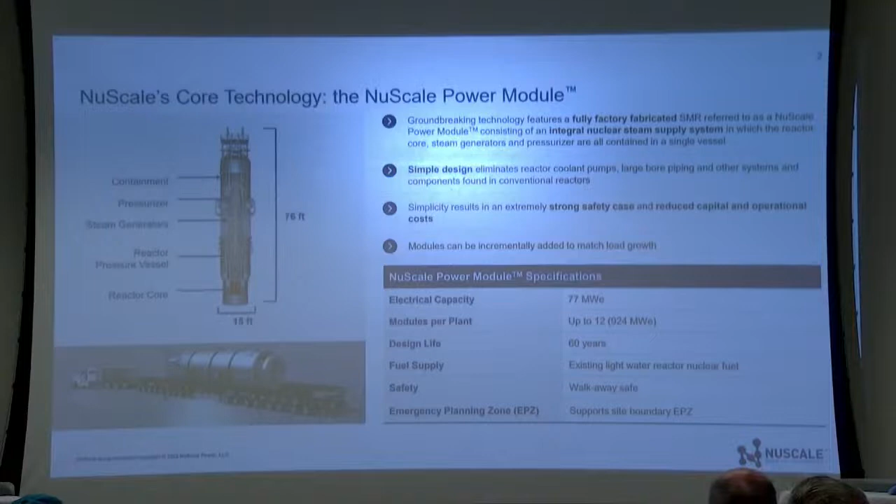Maybe? Oh, okay. Sorry. Okay, so I spoke to this already, but we think that the Alaska market could benefit from a 4-module plant. You would get 308 megawatts of power output. All of the plants, regardless of the number of modules, have a similar safety strategy, similar type of footprint. You're just changing the size of your reactor building, the size of your peripherals to generate power.

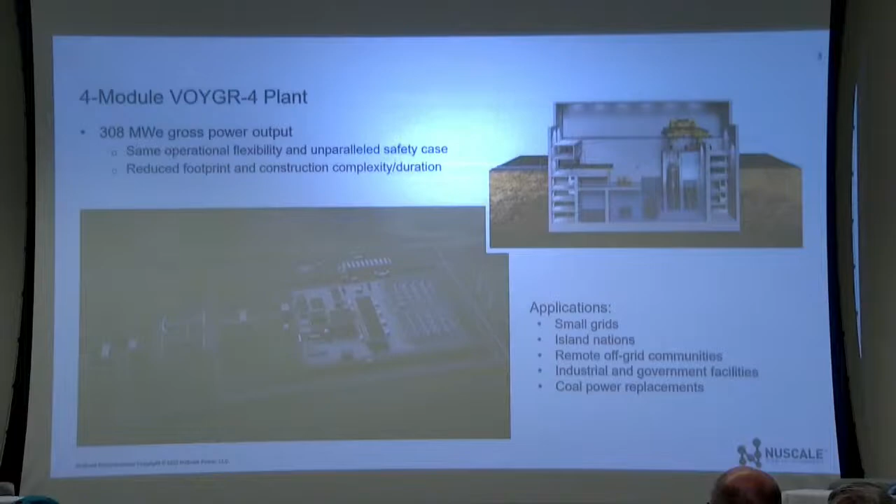We believe the applications for a plant like this could be small grids, which we know you have many of in Alaska now, island nations, remote off-grid communities, possibly industrial or government facilities. This is definitely bigger than what they're asking for the Eielson pilot project, but also as coal power replacements.

So if I go to the next slide, what am I pointing at? Okay.

We actually think that these power plants can be built to replace retiring coal plants. So the numbers up here are for a 12-module VOYGR plant. So it would yield 1,200 construction jobs for 3 years, operations jobs, and our operating life is 60 years for a plant, as well as other indirect jobs. It would preserve the local tax base.

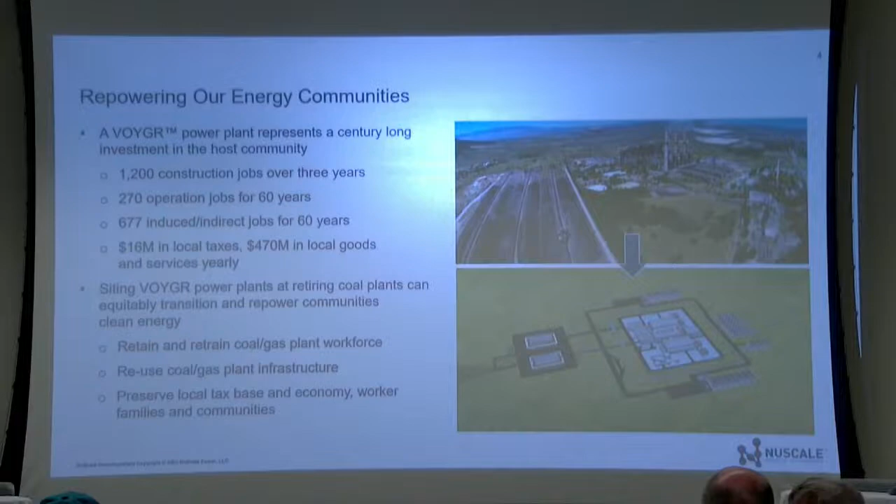So obviously the numbers would be scaled down for a 4-module plant, but it's not necessarily a linear scale, the construction jobs especially. We believe that these can be sited at retiring coal plants or other existing fossil fuel plants, and that the workforce could be retrained. So we've actually done some analysis to map the jobs at current fossil fuel plants to what the equivalent jobs would be with retraining at the NuScale power plants.

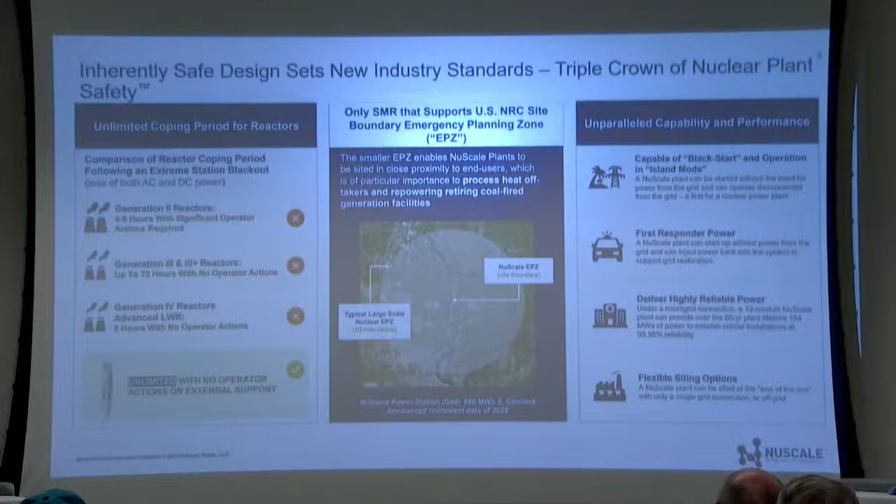This is my last SMR slide here. So we talk a lot about our inherently safe design and it being a new standard for the industry. So I just want to point out here that the things shown on the left talking about the different generations of reactors, all of those reactors have a proven history of safety. All reactors are operating safely currently.

The difference with our reactor is that ours is walkaway safe. So if there were to be a problem, it could basically be in an unattended state for an unlimited amount of time, and there would need to be no interaction to keep that reactor safe and no hazard.

So I mentioned earlier the emergency planning zone, so it's kind of hard to see on the projector, but there's a big shaded circle that shows a typical large-scale nuclear EPZ, which is a 10-mile radius, and then you can see that tiny little dot in the middle is the NuScale EPZ. So really, we can site these closer to population centers than typical nuclear reactors because they're smaller and they are inherently safe.

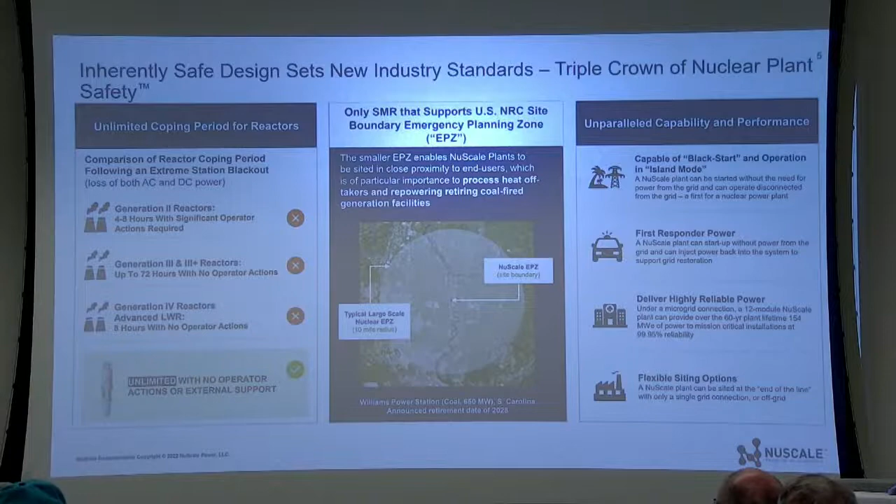Just on the right side, some additional capabilities that you're getting from a small modular reactor that don't exist for a lot of current nuclear facilities. We can operate without connection to the grid. We can provide basically startup power back to the grid in the event of a loss of power. The power is highly reliable, and flexible siting options means that it can operate off-grid or at the endpoint of a grid.

So that's all I have to say about our SMR. I talked about that because that is NuScale's bread and butter right now. But we are also developing a microreactor. So that's what the rest of the presentations I think are going to focus on.

We're doing market analysis. We identified these different markets. So we're very interested in working with universities to deploy new research reactors to further the study of nuclear engineering. We believe microreactors are appropriately sized for mining operations. Also, our design can be used for either space or terrestrial power. Remote off-grid communities, again, microgrids, replacing some existing microgrids or augmenting existing microgrids.

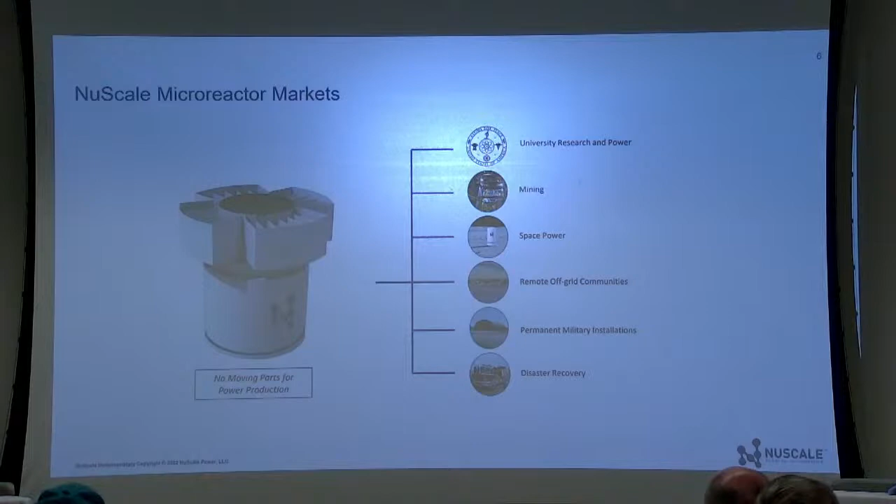Permanent military installations, this is a stationary reactor, it's not a mobile reactor. And then in the event of a disaster where the power grid is severely compromised, being able to stand it up quickly and help recover that power grid is another application for the microreactor. So the thing about the microreactor is it has no moving parts for power production. Everything is happening by natural circulation, similar to the SMR.

So our conceptual design is really focused on a similar design for both space and power applications. It's small and compact, highly reliable, automated, and it can be stood up quickly. So very similar between the space power and the terrestrial power designs. We're using liquid metal for both our fuel and our coolant. So that's something that has not been licensed before.

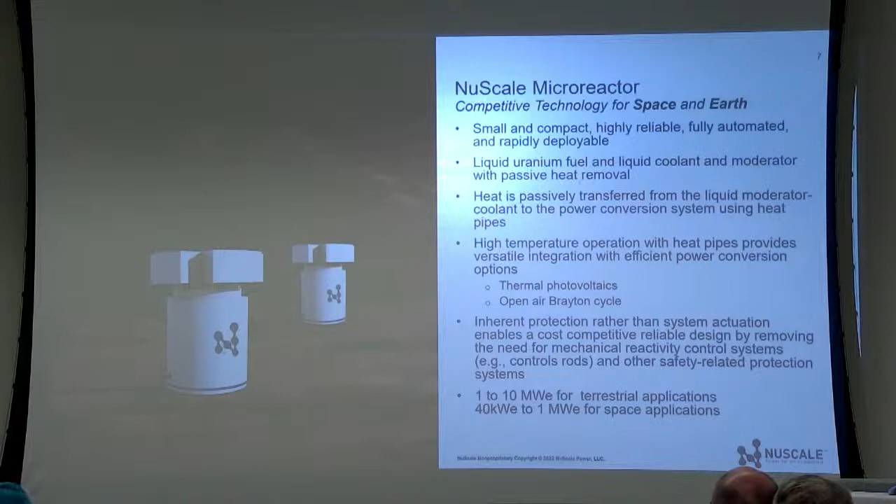So that's something that we're doing a lot of development testing, and we're gonna do early engagement with the NRC to make sure that we're working together on getting through licensing in a smooth way. Once the reaction occurs, we're using heat pipes to transfer the heat into our coolant moderator, and then transfer that to the power conversion system. We have different options for power conversion, either using thermal photovoltaic cells, or we can also incorporate an open air Brayton cycle for our largest model.

So because of the lack of moving parts and the simplicity, we have inherent protection. We don't use control rods, so if we needed to shut down the reactor, there's no moving parts involved. We think this enables a cost-competitive, reliable design. And then as far as sizing goes, we are designing for 1 to 10 megawatts electric for terrestrial application, or 40 kilowatts to 1 megawatt for space applications. So that is all that I have.

Sorry, I talk fast. Yeah, no, that's great. Thank you. We're going to try to adjust the lights so that the lights are off in the front here so we can see the screen a little bit better. You are our guinea pig, Lisa, so we didn't want to start flashing the lights. I think that works better.

So next up, Josh Parker with BWX Technologies. Thank you, Gwen. Josh Parker, Director of Business Development with BWX Technologies, Inc., and their Advanced Reactors Division. So I'll give a little bit of background about BWX Technologies.

Anybody U.S. Navy here? Anybody serve on a submarine or an aircraft carrier in their life? Thank you for your service. You are a direct user of BWXT's technologies. BWXT, our company history is with Naval Nuclear. We have 6,600 employees. We are based in Lynchburg, Virginia, so all the way on the other side of the country. We have 12 major manufacturing facilities that delivers those reactors for the Navy every year. We make 2 to 3 reactors.

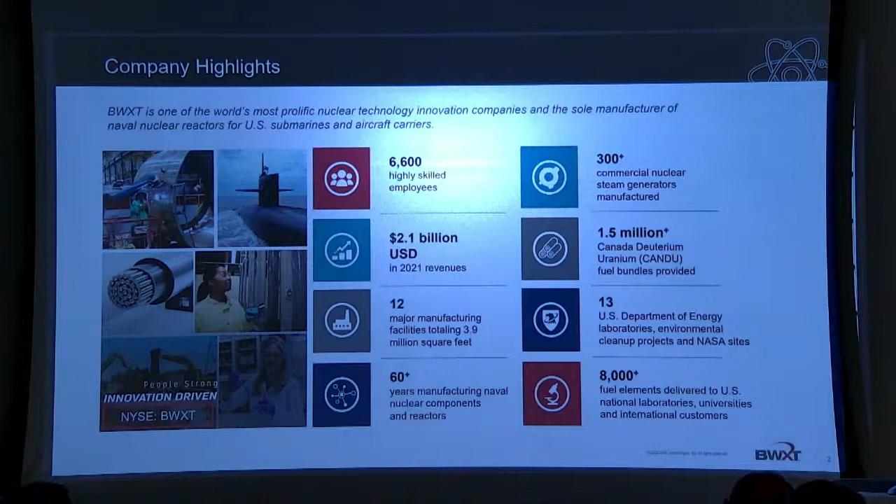We also refuel research reactors in the United States as well as overseas for the high-performance research reactors, such as those that you would find at Oak Ridge National Lab or Idaho National Lab. We do 8 to 12 cores of those a year. We also serve the Canadian business as well. We have a footprint up there with the commercial nuclear and their CANDU fleet, and you can see over there some of the numbers that we provide, both the fuel and other operations for them. We also have an arm of our business that supports the national labs through management and operations as well as environmental cleanup. So that's a little bit about us and what we currently do today.

We have a history. BWX Technologies may not be known, but actually Babcock & Wilcox is a fairly old name. We are the successor to that company. Came out of Stephen Wilcox in the water tube boiler. Those sometimes are still used in fossil industry today. We've got a long history in naval nuclear, first nuclear reactors as well in this country. We were both commercial and defense. We split that business back in the 90s.

And then in 2015, we actually split the fossil side of the business off and focused solely on the nuclear side of the business. It allowed us to focus on new and novel technology. We targeted space applications and advanced reactors for terrestrial applications. We also got into medical isotopes and brought back the capability to make TRISO fuel, which is an encapsulated fuel product for the advanced reactor industry.

So what does the Advanced Technologies Group do inside of BWXT? So we are looking at space nuclear, so nuclear thermal propulsion. Cuts the travel time to Mars in half. You reduce the human exposure to cosmic radiation, gets you there quicker, and provides for aborts. We're looking at lunar surface power, providing power for the moon for bases there, jumping off point for future technologies and exploration, nuclear electric propulsion as well for strategic initiatives.

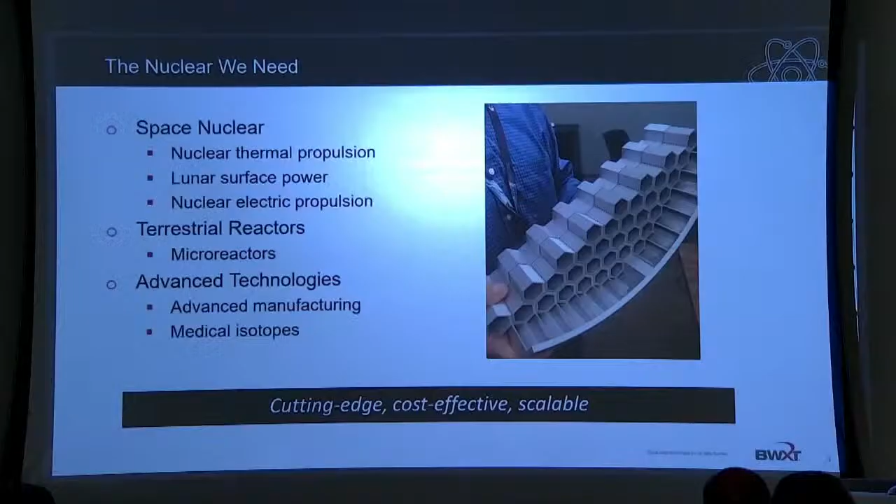So, I already mentioned we have space concepts and development. I'll talk a little bit here in just a minute. We actually are building a first-of-a-kind microreactor for the Department of Defense, and it's in the early stages of manufacturing. We're making procurement and buying parts today. We are in the small categories. We're 1 to 20 megawatts electric. I've got two designs I'll share with you. They are portable, they're scalable, and they're factory fabricated.

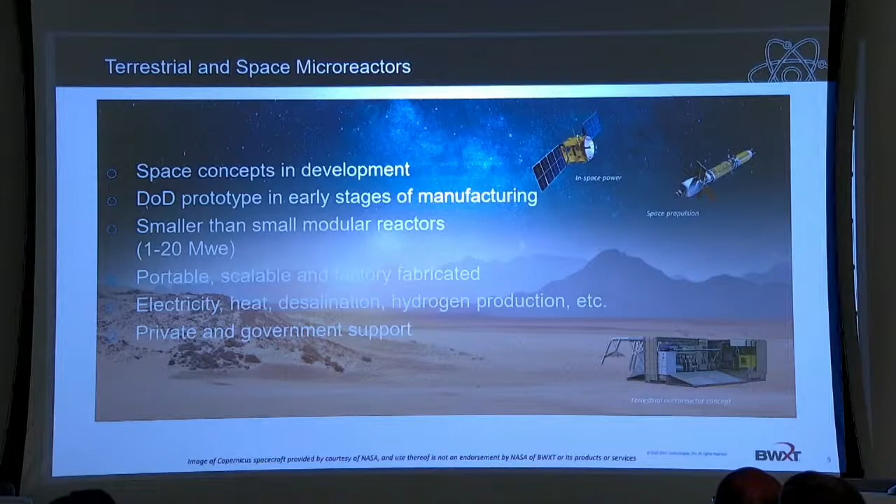So we have that history in our background of what we do. We're looking at electricity, heat, desalination, hydrogen production. Where does nuclear make sense and plug into and enable technologies? And we work with private and government support to enable this technology. So I mentioned the Department of Defense reactor. It's known as Project Pele. It's a 1 to 5 megawatt electric microreactor. It is a high temperature gas reactor.

It is using the TRISO fuel, which I often call the everlasting gobstopper. So you've got a very center of uranium, and then it has 3 coatings on the outside to contain all the fission products inside of it. So imagine the head of a ballpoint pen, and that's the size of a TRISO particle there, and it holds all the fission products and radiological issues that you would have inside a reactor inside of that.

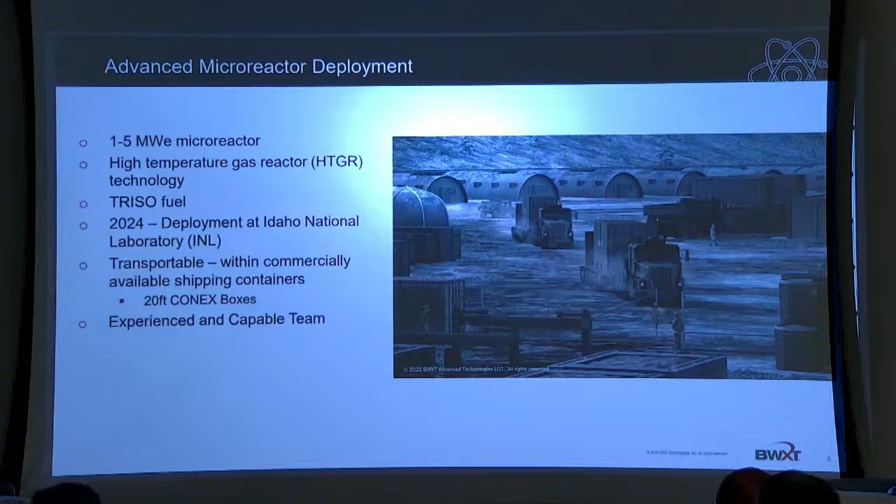This reactor is, like I said, being manufactured. We are procuring parts today, and it will be deployed at Idaho National Lab in 2024. It's going to be transportable within commercially available shipping containers. The DoD said, put it in a 20-foot Connex box. So we've got those that will be there. We've got an experienced and capable team that goes beyond BWXT in delivering all the technologies necessary to bring this to reality for the Department of Defense.

We have a slightly larger reactor design. We're very creative with names. We call it Banner, which stands for BWXT Advanced Nuclear Reactor. I keep trying to convince them that we ought to get Bruce Banner and the Hulk to advertise, but we don't have that budget.

So you may be familiar with the Department of Energy Advanced Reactor Demonstration Program. We're in the risk reduction category, which is a category 2. Risk reduction means that we're shooting for economic improvement of the reactor. So we're targeting a couple of technologies to bring this technology down to a cost-effective level, theoretically cutting the cost in half. It is also a high-temperature gas reactor, so some similarities with Project Pele above. It's 50 megawatts thermal, 17 megawatts electric, so quite a bit bigger than the other one. You can scale it. You can put multiple units on a site.

It's got a high power density fuel. It's the TRISO fuel as well. It's got a 5-year refueling cycle. Inside of that reactor, there are 5 modules there that you need for a high temperature gas reactor to make this work. Every last one of them, as a requirement, has to fit on a commercially shippable truck. I don't need special transport. I can put it on there and get it to the location.

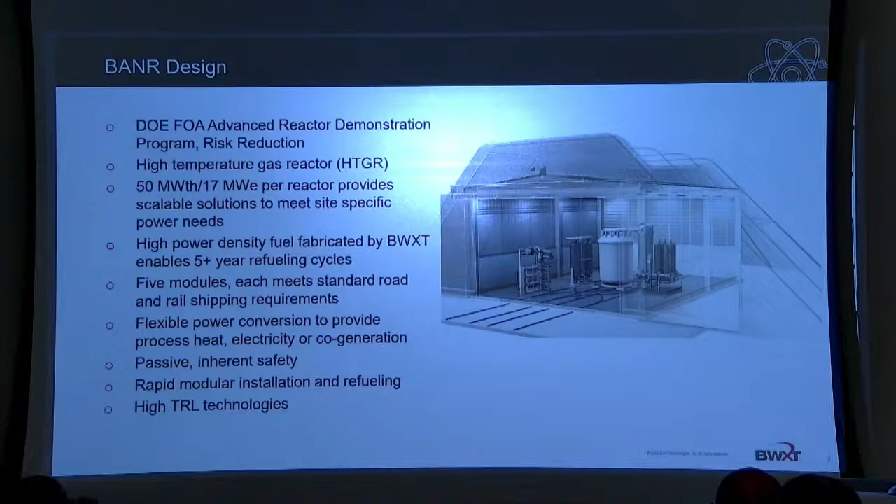Refueling: we don't intend to ever open that core. It's a cartridge. We take it in and out, so you don't have nuclear fuel shuffling or handling that you would have in larger nuclear power plants. We try to use what's known as high technology readiness level tech to do this and deploy. So you'll sometimes see us throw acronyms around, and I apologize for that, but that's what TRL means.

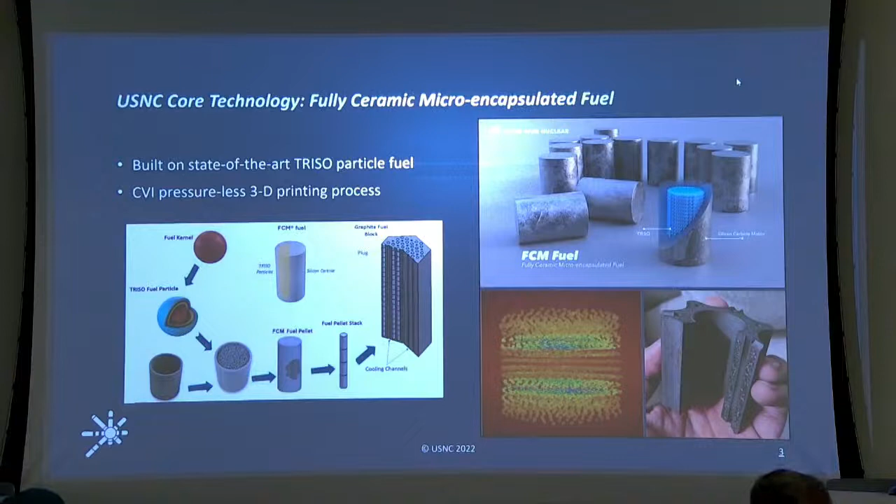The concept is that the margin of safety of the reactor should be so large, so forgiving, that even if no one acts, the reactor not only is going to be safe for the surroundings, but it's going to preserve itself without being damaged. Operationally speaking, the reactor will not be damaged if it is left operating by itself. This is an important concept because not only do we make the population safe, we also make the investment safe.

Next slide. Okay, so our design is underground. It's about 5 to 10 megawatt electric, which is equivalent to 15 to 30 megawatt thermal. Think about it as being around 15 yards underground. The reason we like that configuration is because it is very difficult to access the reactor. Even if you would like to damage the reactor, it is not really exposed.

So that makes one level more of safety in terms of how we protect the reactor itself. We refer to this reactor as a battery more than a reactor. The reason why we think in that way is because in reality it is an energy container. So that core that you see there contains about 3 billion kilowatt hours. And the time that it is going to last really depends on how fast you want to drain that energy.

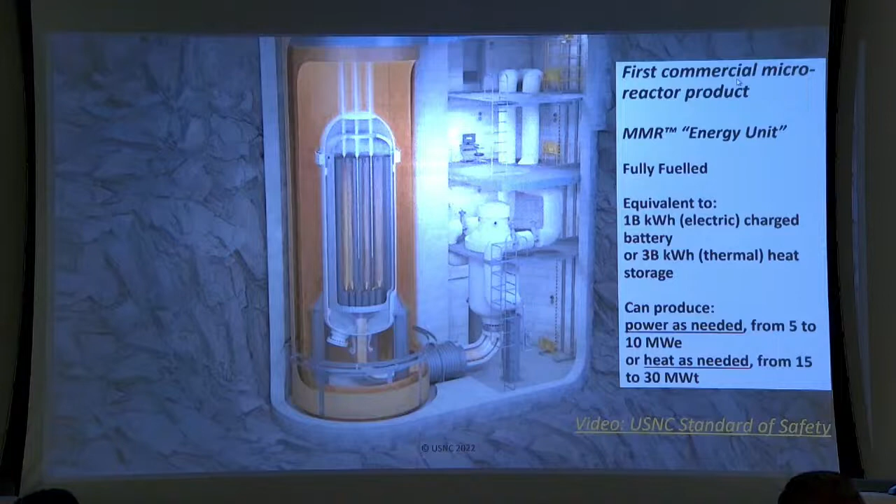So you would operate the reactor, and if you operate it at a very high level of output, it's going to last less. If you operate it slower, it's going to last longer. So think of this reactor like a slow burning candle. It takes a long time to run out of energy.

And I say slow burning because the level of power of the reactor is always very low, which goes back to the concept of safety, because the risk, which is proportional to the content of energy, to the power that is inside, is always very low because this is a very slow burning machine. And that helps with the concept that I just said before, that it is walk away safe and come back safe.

It's about 6 months construction time, and also it really works very well with variable renewables, with solar and wind, and with the fact that you may not always need 100% of the power. So this reactor will go up and down, and also will have a storage system that will store the heat.

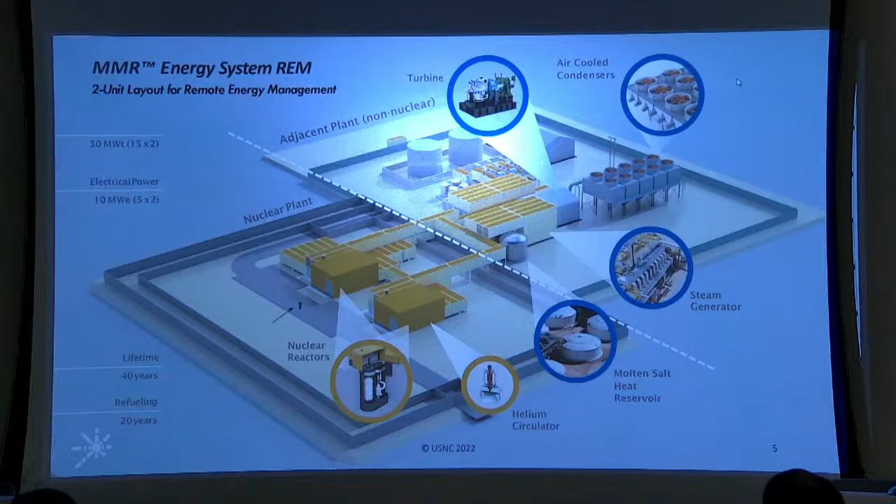So depending, maybe in the night, maybe on a sunny day, you don't need a lot of energy, so you can actually store that excess energy in a molten salt system and take it back later on when you really need it.

We actually have 2 ongoing projects. One is in Canada. It is our first deployment, and it's going to be operational by 2026. The only information that I really want to transfer with this slide is the fact that our first operation is going to be 2026. We have a very strong team and a collaboration with a very large operator in Canada, which is Ontario Power.

In terms of timeline, that allows us to say that in 2027 we will be commercial, and it will not be first of a kind, because this is going to be the first of a kind, and the next one is going to be the second of a kind, which is the University of Illinois. And I also want to draw your attention to the fact that the reactor at the University of Illinois is going to be built on the university campus.

So we go back to the discussion and point out that it will be possible to build these reactors close to the population. They are not a threat to the population. Of course, the NRC is going to have the final word on this, but the expectation is that the zone of safety around the plant will not be extended outside the plant itself.

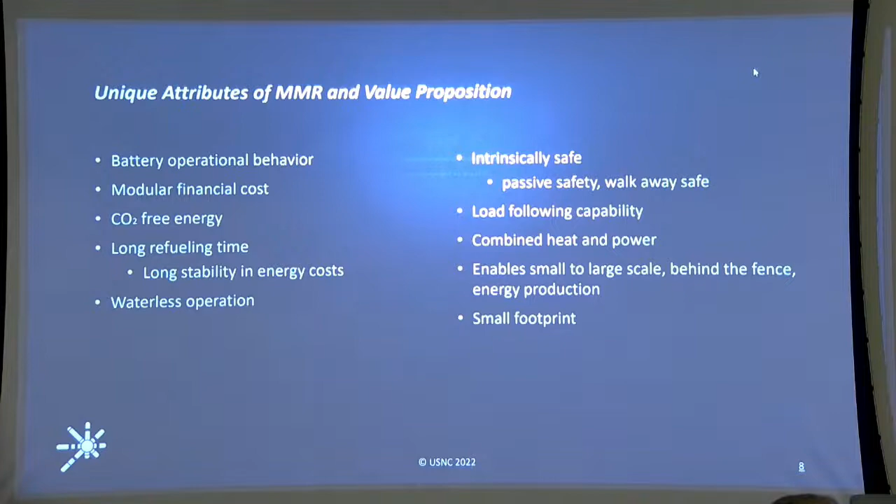I think that concludes my presentation.

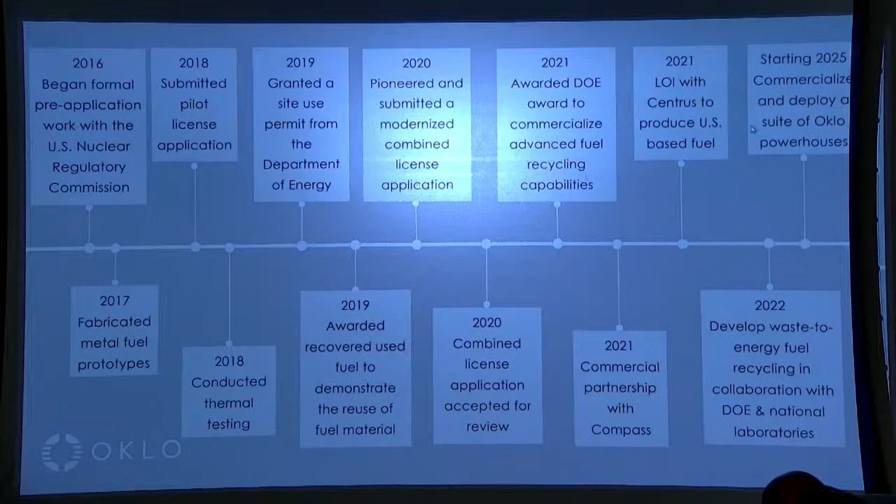It's an A-frame, which of course is great for snow loads in places like Alaska. It also is a very small footprint, so we need less than an acre of land. You don't need any water, and this is what gets me really excited as the siting lead, is that we can really put this anywhere. And so it's a very robust facility. It does not need very many natural resources, which means we can focus on things like where the community would prefer it to be, on avoiding ecologically and culturally important locations, and that I think is extremely important about this design.

More information about the actual design is that its electric capacity is 1.5 to 15 megawatts electric, which means it's 4 megawatts thermal to 40 megawatts thermal. It's metal fuel type with liquid metal coolant, which means it has really great heat transfer properties. So as we all know, metals conduct heat very well, and so that helps with our inherent safety case.

The capacity factor is greater than 90%, so that means that it's up and available basically all the time, and this is possible due to having refueling cycles of 10 to 20 plus years, so that means that we're not down for refueling. It also works very well with renewables. We can add energy storage to the system, and we can also produce heat or power or both.

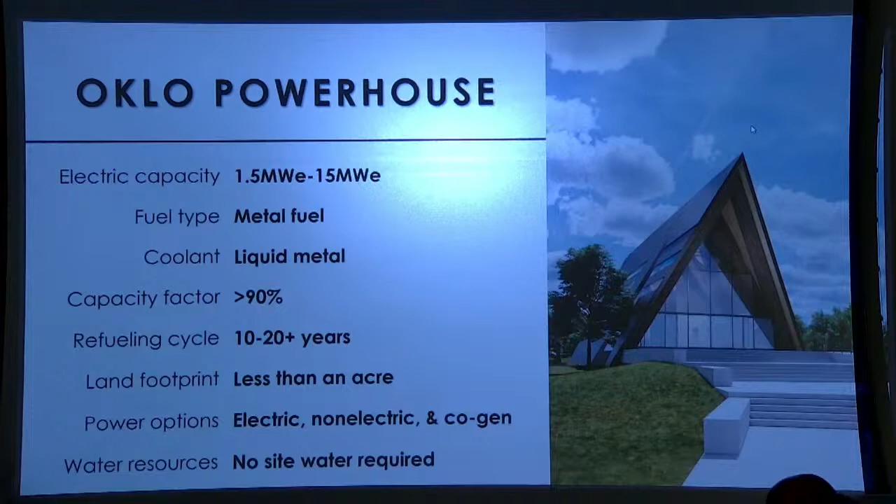Okay, as I mentioned before, the Experimental Breeder Reactor 2 was a reactor that operated at Idaho National Lab for 30 years. And we've talked a little bit about walk-away safe, and what's great about the reactor design we're using is that it's really proven walk-away safe. This is something that's operated not only in the United States, but around the world. There's commercial facilities around the world. This is a proven technology.

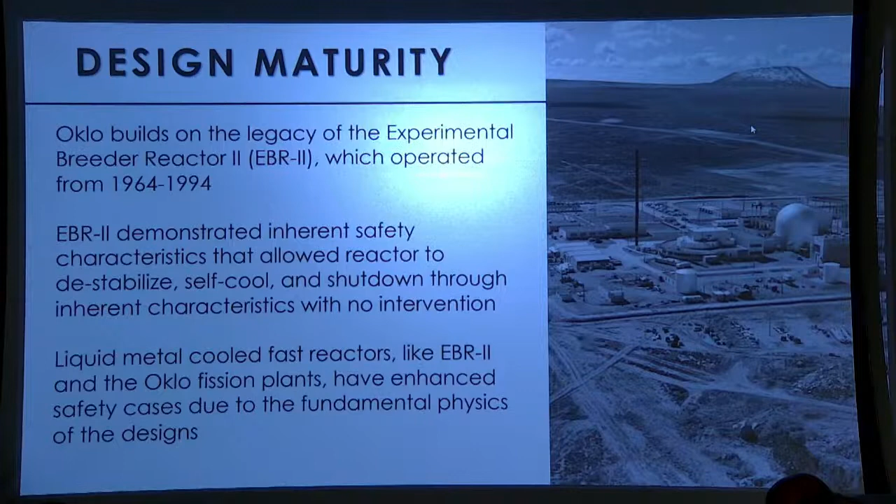It demonstrated inherent safety with a couple different tests. I'm happy to talk about those during the Q&A session. I know we don't have a lot of time during this presentation, but Oklo is really capitalizing on the proof of concept that has already been done by the national labs.

Additionally, this is where we'll be getting our fuel. So our first fuel load will be coming from the Experimental Breeder Reactor 2. So that shows that this is really very similar characteristics and design to reactors that, while very different from existing light water reactors, are very well proven.

So some of the operating benefits of nuclear in general. Nuclear doesn't require that many materials. You can see here it's just very little compared to other power sources. So there's inherent cost benefits from just having less materials, as well as compared to existing nuclear power plants today. There are just a lot fewer components. It's passively safe, it's very small, and it's a very simple design.

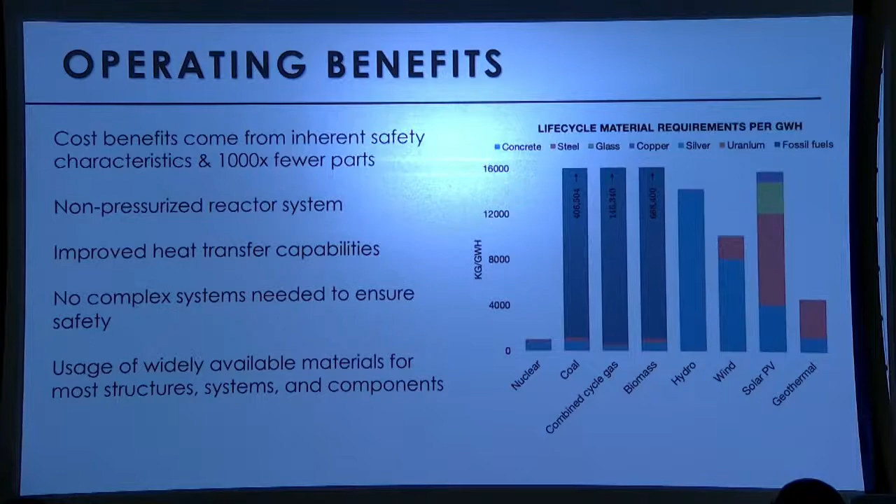So additionally, we use widely available materials for basically all structures, systems and components. This can be readily shipped on existing roads using existing transportation methods.

Okay, so just a little bit about the Oklo business model. So what we learned talking to people is that people do not want to own a nuclear power plant. They want to buy clean electricity that's affordable and reliable. So Oklo owns and operates the power plant and offers power purchase agreements like other power generation sources. Of course, for advanced nuclear to be successful and for Oklo to be successful, those terms have to be competitive with other power sources. And so we're offering these at competitive prices.

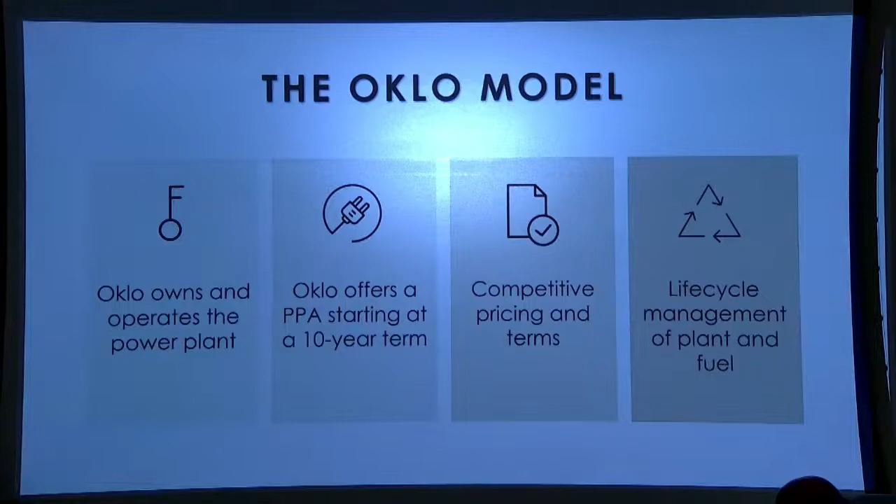Additionally, Oklo not only owns and operates, but decommissions the facility. Additionally, for Oklo, the fuel is a very important resource for us. So we take that back so that we can use it in future reactors.

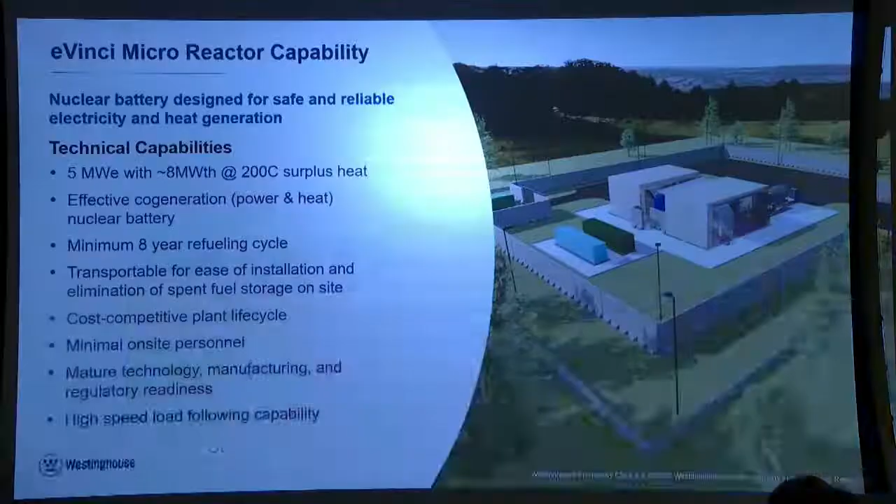This is our design. I won't talk a ton about the design, but what is different of ours is there is not a pumped reactor coolant system. So when you talk about Fukushima, which is one of the well-known accidents in the entire world, what happened was they lost their diesel generators when the tsunami came, and the power output from that plant was also lost. So the plant had no way to continue water circulation through the fuel. And in the existing plants, if you cannot maintain water circulation, the fuel will get too hot, and that can cause an accident, which is what happened at Fukushima.

Many of these designs have much advanced fuel, including the eVinci that uses a TRISO-based product, as it's been talked about today. But also, this design does not have any pumped reactor coolant system. We are using completely heat pipes for transfer of heat, which are very similar to thermosiphons, which operate on the Trans-Alaska Pipeline to keep permafrost frozen. So we're actually moving all that heat without any mechanical components. So by definition, your ability to maintain your cooling is much improved than if you have mechanical equipment that relies on electricity or other motive forces to actually keep your reactor safe.

Also, this design, when it's operating at full power electricity, it has no moving parts, which from a reliability perspective matters. Nuclear power plants are very large, very complex. Some of the nuclear plants on Earth right now achieve 92, 93% availability, and that's with a very large, complex plant. This literally lowers the number of components by orders of magnitude. Next slide.

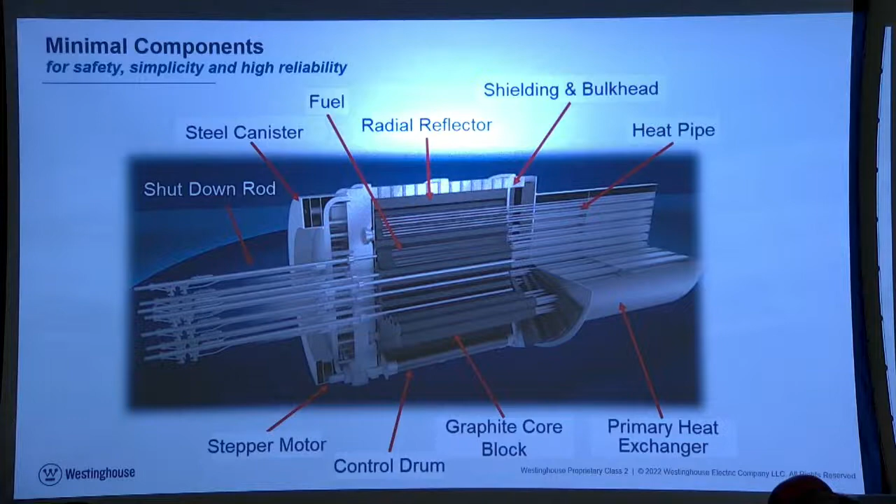You have to have improvements in how many security resources you need, which we have; our security plan has been submitted to the NRC. You have to have a plan for how you're going to refuel and decommission. You have to have all these things. So Westinghouse has been building this technical volume up. We've sent it to NRC in the pre-licensing process. We've gotten formal feedback on 3 of the 4 tranches of papers that we have sent. The 4th was just sent recently, and our final will be sent in November 2022.

So this will now position us very well to move into what we're doing right now, which is finalizing our design for a test reactor that will operate at Idaho National Lab, and then go for full US NRC design certification for this product. And this is a path that we had talked about quite a bit with the US NRC, and we felt was really the right approach to do something new. You have to do, we felt, a lot of physical building and testing to prove it. And so that's the body of knowledge we've been building up over the last 5 years.